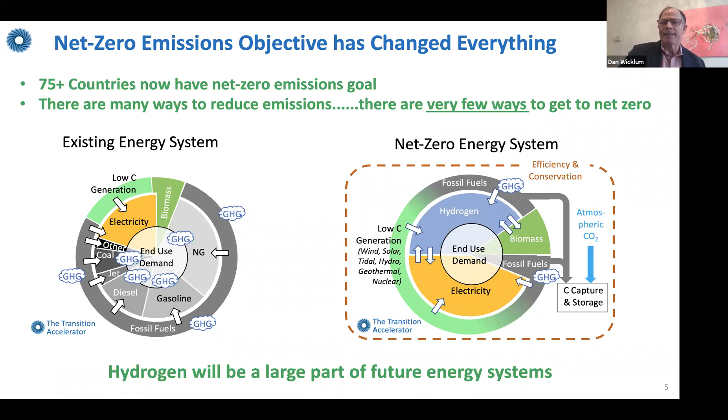Next slide then, Dave, a couple of data points here. Why can't you have a net zero energy system without it? Well, there's some things hydrogen can do that other types of energy can't, and one of them is moving heavy things around the landscape - batteries just get too heavy. I'll talk about that in a second. This figure is pretty cool, and this is not our data.

This is an independent study from 2018, but it's been verified several times since. The details don't really matter, but what this shows is the cost of producing hydrogen at different places in the world using different technologies. Along the x-axis is the cost of producing hydrogen - units don't matter, it happens to be dollars per gigajoule - so the further right you go, the more costly hydrogen is to produce. On the y-axis, all these green and blue bars show where hydrogen is made in different parts of the world. So you see countries, and there are also two major types of hydrogen being produced.

Green hydrogen is when you take water, and as long as you have a clean electrical grid, you use that electricity to split the water into oxygen and hydrogen. Down at the bottom you have blue: you can take basically any hydrocarbon - the world predominantly uses natural gas - but if you put it through an upgrading process called reforming, and so long as you capture the resultant carbon dioxide and sequester it, then you've got very low emission, low carbon footprint hydrogen as well. People call that blue hydrogen.

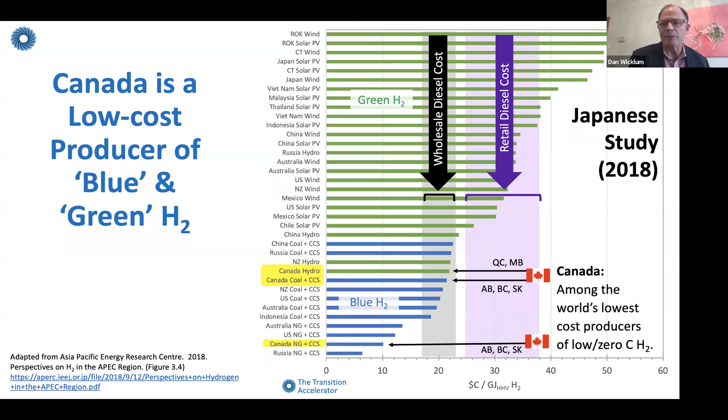You'll notice also that we have about the lowest cost green hydrogen in the world as well. So think about a world where we are taking Canadian energy, whether it's electricity or fossil fuels, and we're changing it into a fuel that we can burn in engines, burn for heat, that is fully compatible with a net zero world. That's really the hydrogen promise.

Next slide. And over to you, Dave. Okay, thank you very much, Dan.

What I'm going to try to do is give a bit of an overview of the document that we came out with yesterday, but also touch back on some of the previous report that came out about a month ago or so, and highlight some of the issues I think are relevant as we talk about the transition pathway we see laid out for the Alberta Industrial Heartland.

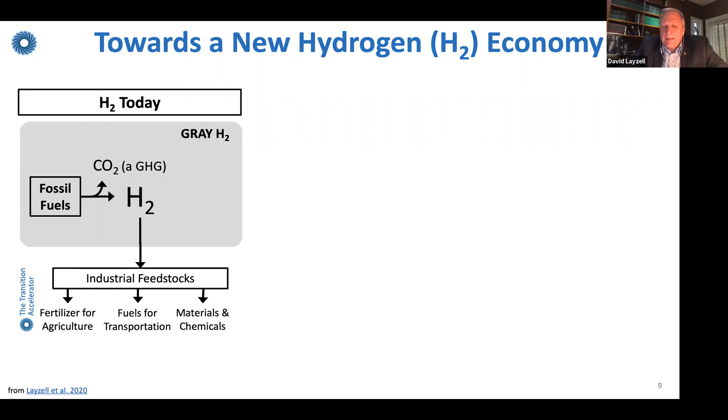So I want to start by talking about the environmental implications and market potential for Alberta hydrogen. We actually have a pretty vibrant hydrogen economy in Canada today. We take fossil fuels, we make hydrogen. It does release, for the most part, CO2 to the atmosphere as a greenhouse gas. That hydrogen is used as an industrial feedstock. It's used to make fertilizer for agriculture, to crack bitumen into synthetic crude oil, to convert crude oils of various sorts into gasoline, diesel, jet fuel, and to make plastics and other chemicals and materials.

What we envisage for the future is still producing the same kind of industrial feedstock products like fertilizers, etc. But instead of releasing the carbon to the atmosphere when you make hydrogen from fossil fuels or even from biomass, we're looking at capturing that carbon and sequestering it deep into the earth, down deeper than a kilometer below the Earth's surface.

There's also other places that we can get hydrogen. There are some chemical plants across Canada called chlor-alkali plants. They make things like sodium hydroxide, and they actually produce hydrogen as a byproduct. Many of these plants actually don't know what to do with the hydrogen and release it to the atmosphere. So there's a possibility of capturing that hydrogen and making it into a fuel. Obviously, that's a low-cost fuel with some benefits.

There's also, as Dan talked about, a possibility to make hydrogen from renewables or nuclear energy, splitting water into oxygen and hydrogen. What we are envisaging is a significant increase in the amount of hydrogen we produce, so we're not only providing an industrial feedstock, but also providing hydrogen as a fuel, and hydrogen for export to other economies. We see hydrogen being possible to use for transportation fuels, for buildings, for heating buildings, for industry, and as well as for power generation.

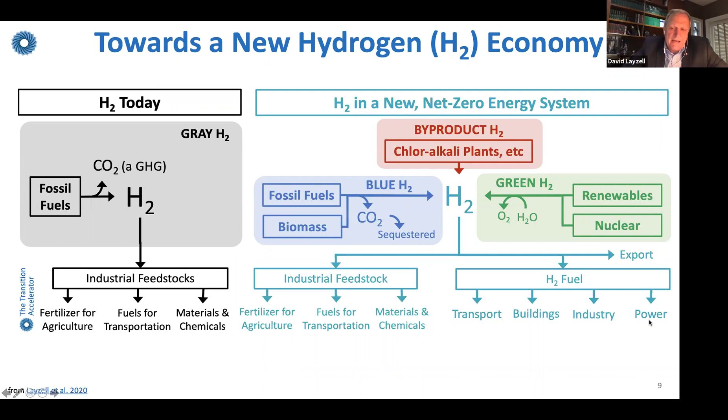So Canada has, as Dan mentioned, very low-cost blue and green hydrogen, some of the lowest in the world. But what about the environmental footprint? We've done the life cycle analysis of blue hydrogen production, looking at the whole life cycle, including the emissions associated with extracting natural gas from the earth, processing that natural gas into pipelines, and converting it into hydrogen.

When you couple the carbon capture and storage, the overall carbon footprint is about 3 kilograms of CO2 for every kilogram of hydrogen. In comparison, for green hydrogen, looking at the life cycle emissions from a large hydro facility, or wind or solar facilities, it's about 0.8 to 3 kilograms of CO2. So they're in the same range, with green hydrogen often a little lower than blue hydrogen. There's hope that if we reduce some of the methane emissions upstream, we can get blue hydrogen even lower than it is today.

One of the important things here is that whether you take blue hydrogen or green hydrogen, when we use it to replace our existing transportation fuels like gasoline, diesel, and jet fuel, there's a reduction in life cycle emissions estimated to be around 80 to 95%. If we use it to replace natural gas in buildings, industry, or power generation, it's in the 67 to 90% range. So this is very significant.

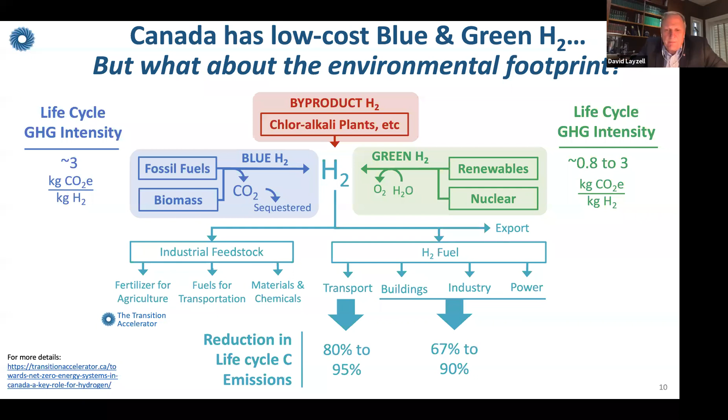This tells us that we're on the pathway to a net zero world by moving towards hydrogen. Obviously we need to get rid of all emissions to truly get to net zero, but this will take us a good part of the way, and we can see ways of cleaning up the rest of the emissions as we move into the future.

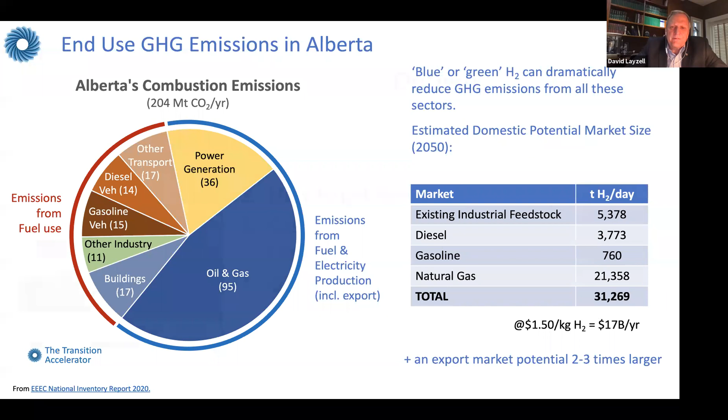So there's obviously a big opportunity here. We know from the data Dan has shown you already that we can make blue hydrogen at a lower cost than even diesel fuel, the wholesale cost of diesel. So how do we actually start to make this new energy system work and put it together in a way that, as the mayor just mentioned, ensures economic viability without ongoing continuing public investment? One of the big things to understand about building a new hydrogen energy system is that even though we can make it easily, there are some significant challenges with hydrogen.

It is a gas, so it's much more difficult to pick up and move around and to store than liquids are, especially if you start trying to think about moving the gas in small quantities. So what we need to do is to build a new energy system through hydrogen nodes where there's an alignment of what is needed.

First, an ability to make low cost waste, blue or green hydrogen, and significant amounts of reliable production of low cost hydrogen from these sources that is also low carbon. Substantial nearby markets for the hydrogen, especially in transportation and heating fuel markets—we see those as having the greatest opportunity, but there are other potential markets too, including some heavy industry markets. And an ability to connect the two, ideally with pipelines.

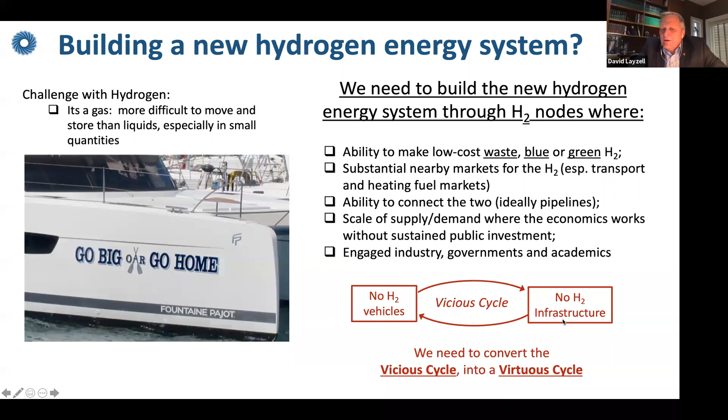So somehow we need to convert this vicious cycle into a virtuous cycle. We have an opportunity to do it in certain parts of Canada where we can actually have low-cost waste, blue, or green hydrogen, and so we can start to provide that and find a way of breaking this vicious cycle and making it into a virtuous one.

The strategy we're proposing, specifically focused on the Alberta Industrial Heartland, gives us an opportunity to do this by piggybacking on low-cost industrial blue hydrogen production. This is industrial scale blue hydrogen production, typically made in large reformers or large factories that convert literally hundreds of tons of hydrogen per day—typical facilities somewhere between 200 to 500 tons of hydrogen per day.

It can be produced by capturing the carbon and sequestering it. The cost of that, including carbon capture and storage, is about $1.50 a kilogram of hydrogen. And this is already being done within the Edmonton Industrial Heartland region.

We want to take a pipeline from that and extend it out to possible markets for fueling trains, for fueling buses and municipal bus fleets or trucks, for supplying residential or commercial buildings. It could even be used in supporting power generation.

We could even take renewable power, convert it into hydrogen, and add it into the same pipeline, because essentially hydrogen is hydrogen—it doesn't matter to any of the end uses whether it's quote blue or green, because it's actually the same molecule. So we want to create substantial nearby markets for the hydrogen pipeline that connect supply and demand, attracting hydrogen-using industries and original equipment manufacturers.

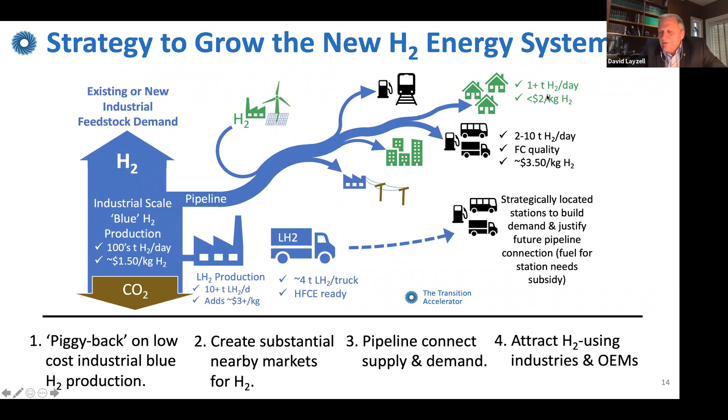In feeding into space heating, we're looking for a lower price. It doesn't have to be as pure, and it doesn't also have to be as compressed as high purity hydrogen, and there are other benefits of putting it into space heating. The real opportunity here is to address the clean fuel standards that are coming out, and this is probably one of the lowest cost ways of doing it, even though this hydrogen is going to be more expensive than natural gas is today.

So what I'd like to do now is talk about the case study where we think we can do what we've just talked about, how we can build a hydrogen node in the Alberta Industrial Heartland. We've picked the Alberta Industrial Heartland because it's a very special and unique part of Canada.

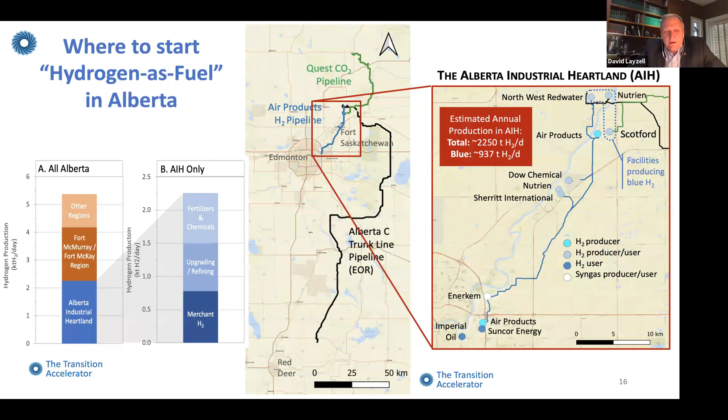Alberta itself produces a lot of hydrogen, some of it produced in Fort McMurray and Fort McKay. Other regions, for example Medicine Hat, produce quite a lot of hydrogen. The Alberta Industrial Heartland near Edmonton produces about 2,250 tons of hydrogen per day, and it's used for fertilizers, for upgrading, refining, and for merchant hydrogen. It sells into refineries, etc.

This region is just northeast of Edmonton. It already has a hydrogen pipeline that belongs to Air Products. It has a CO2 pipeline, the Quest CO2 pipeline, that is already being used to create some blue hydrogen. And it has another pipeline here called the Alberta Carbon Trunk Line that allows carbon to go down to be used for enhanced oil recovery.

We already are producing, in our estimates, about 937 tons of hydrogen a day from these three companies here. They're producing the hydrogen from natural gas or from heavy oil in the case of Northwest Redwater, and putting it into these pipelines for sequestration. So they already have the capability, and they're already producing it at a cost competitive price.

So the issue that we started looking at is, well, where could we use this hydrogen? Where are the potential markets, and how can we connect the two?

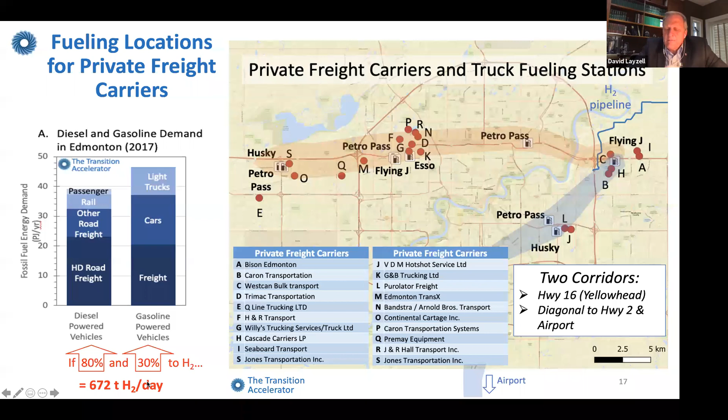Our estimate is that if we look at existing uses of diesel and gasoline, there's a market in Edmonton alone for hydrogen of about 672 tons per day. So it's a very substantive market. Remember that we talked about needing fueling stations with about 2 to 10 tons a day capacity - there's a lot of hydrogen here, enough to support literally dozens of fueling stations.

So enough for 3 or 4 fueling stations, could be very effective fueling stations if this market was to convert to hydrogen. We don't envisage all of this market going to hydrogen, but a significant proportion of it potentially.

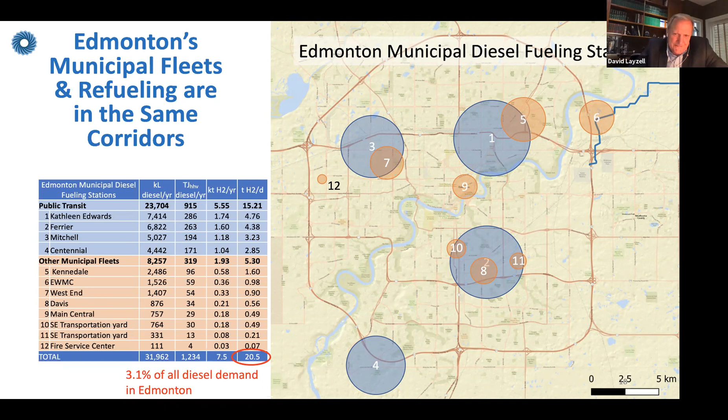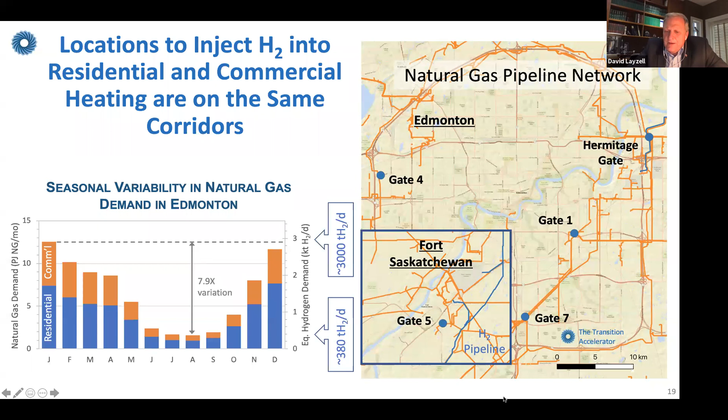But there are other gates within the city of Edmonton as shown here. And you notice that they are also on, like the municipal fleets, like the private fleets, like the trucking station, on the same corridors. That one going across Highway 2 here, Highway 16, and one in a diagonal down towards the airport.

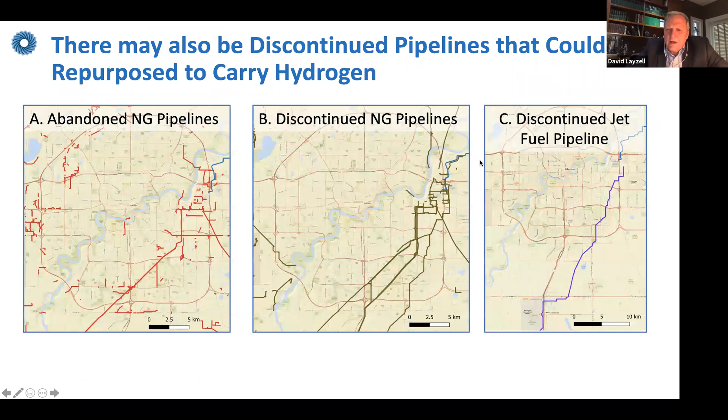These trucks will drive 700 kilometers between refueling. They'll be fueled in Edmonton in the industrial Heartland region, drive to Calgary, drop off a load, pick up another load, bring it back to Edmonton, about a 640 kilometer round distance.

And the road trials are going to begin - we've just been COVID delayed. We expect by a year from now, by November 2021, these trucks should be on the road. They're being built now in Montreal, and we're excited. The design is finished - we just have been involved in finishing the design of this, and we're going to see these trucks on the road in a year from now.

We're also working with some others. In order to really grow the demand at the fueling station, we also need to be able to look for other ways of reducing greenhouse gas emissions, incorporating hydrogen into our infrastructure, our existing fuel infrastructure. And so we see an exciting opportunity with hydrogen diesel dual fuel vehicles.

There's a company in Vancouver called Hydra. There's a group at the University of Alberta that's also working with engine companies to actually modify - both of these are technologies for putting hydrogen into existing diesel vehicles. You do a modification of the engine and inject hydrogen in. One can inject in the Hydra system up to about 40% hydrogen within the energy provided by diesel. And the work at the University of Alberta, they're trying to get higher because they're working with the actual software of the engine to maximize engine performance.

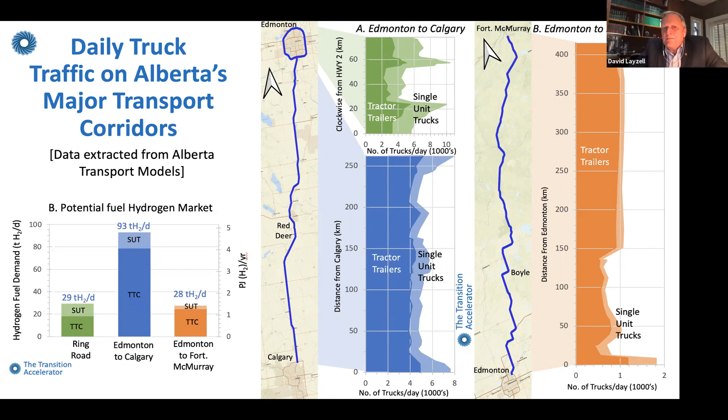So we see this as a real target market to bring hydrogen and start providing fueling stations to support heavy freight. Our goal is to create not only a greater Edmonton hydrogen node supported by the industrial heartland, but also nodes in Fort McMurray, where there's a lot of hydrogen production, and nodes in Calgary. Calgary doesn't have hydrogen production nearby, but we might be able to bring it in with pipelines and create demand.

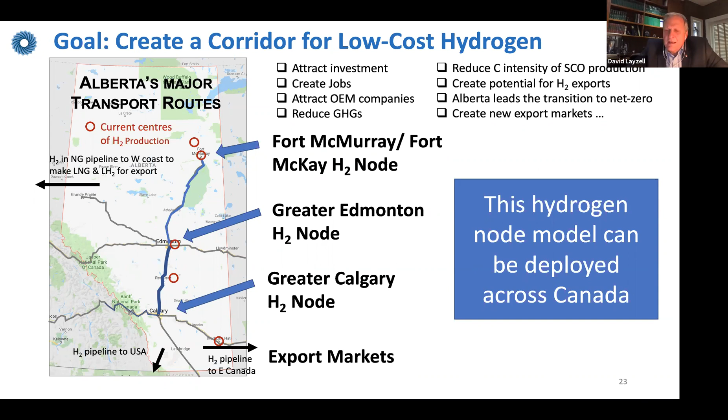Another opportunity, which I think is really important, is the potential for export markets to other places in Canada, the United States, and even overseas. These are some of the node models we're looking at for Alberta, but we've also got opportunities across Canada around refineries and other places, like chlor-alkali plants, and places with low-cost electricity, to develop these hydrogen nodes and other opportunities.

I feel like we blasted through an undergraduate course in about 40 minutes, but that's, I suppose, the way it works. I've been active in the chat here, and it's actually really, really interesting. I think there's really constructive dialogue going on there. We have half a dozen or more questions here, so I'll start on a couple.